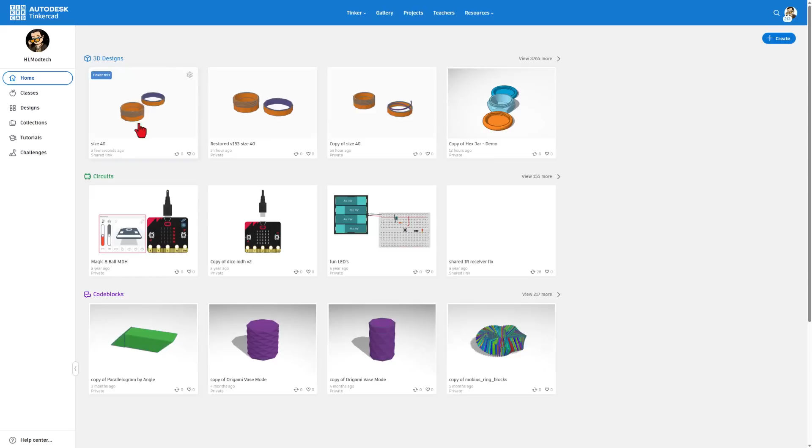If you've never used Tinkercad before, you can get here. We're using Tinkercad.com. I always choose sign in with Google. This is what designs look like. You can see they are saved to the cloud. I've had a few of these as I was fiddling.

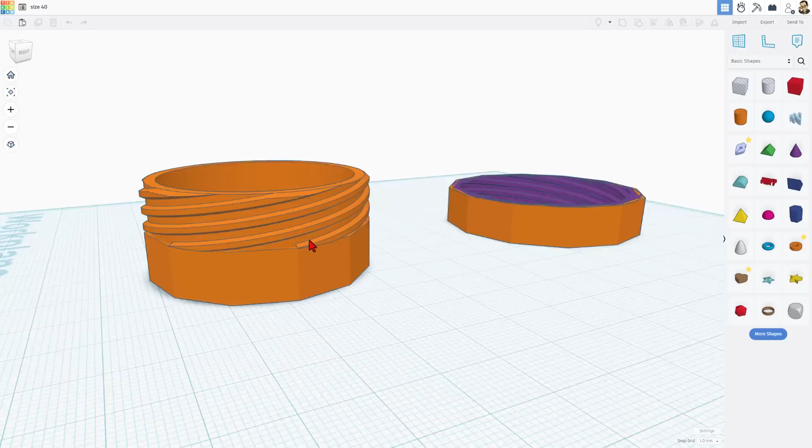I'm going to take you into the size 40 real quick and let me show you what it looks like. This is the thread. Now this thread is shared by ZDP 189. It has characteristics that make it better for 3D printers. The sloped angles make it easier for the 3D printer to print it, and they turn out really slick. It has 6 starters so that they're easy to put on, and they tighten really quick.

Once again, that's the working version. You can see how slick it turned out. Really quickly, let me bounce you back, and let's make a scratch one. We're simply going to hit create brand new 3D design.

I am going to start by naming it. We're going to call it thread 34. And we're going to search for the star of the show, the thread shape. If you type thread, bingo, it shows up, and we'll bring the thread out.

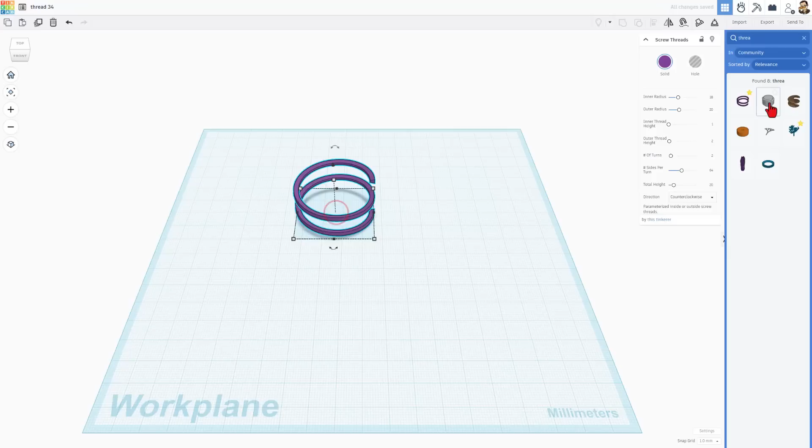I do want to highlight, a lot of people use this ISO metric thread. I'll set it beside it, and I'm going to show you real quickly, its thread pitch is a little bit harder for 3D printers to work with. That is why ZDP came up with this awesome technique. If you haven't seen my how to make an ISO thread video, I will have that listed up above.

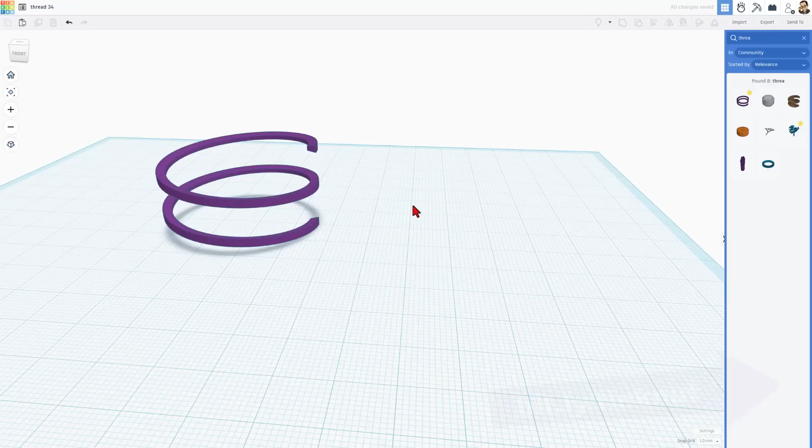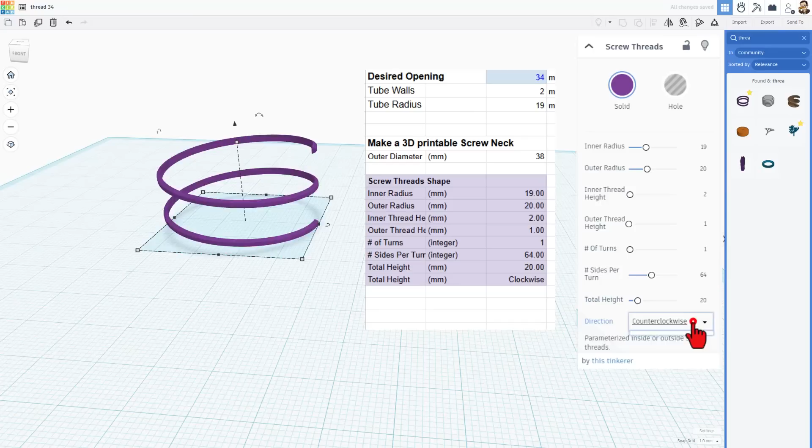So now let's go to the spreadsheet. First, we're going to make the screw neck. Once again, these are the numbers that were calculated. For that size 34, I'm going to type 19 and press enter, 20 and press enter, although that already was there. And then we're going to do 2, press enter, and 1, press enter, and 1 for the number of turns. We're going to keep the 64, we're going to keep the 20, and we've got to make it clockwise.

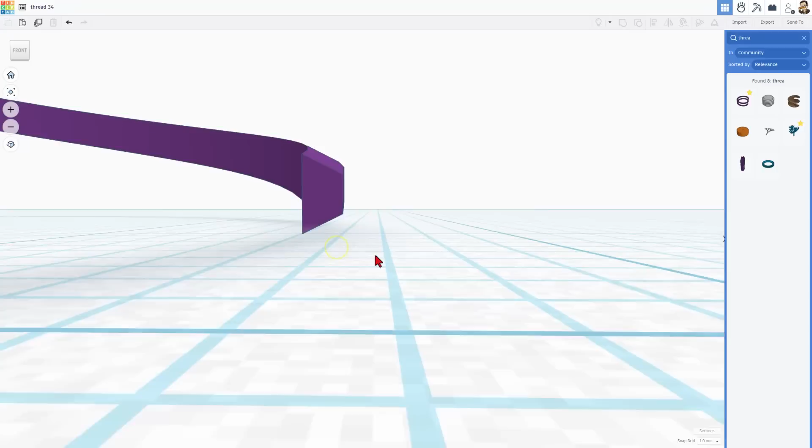Notice the red lines as the system is thinking. Just be patient as that all snaps into place. I'm also going to hit D to drop so it's at the correct level. Now friends, this is our thread, and when you look at it from this angle, you can see that's why it's easy for a 3D printer to print. It slopes up all the way around. That is the basis of the system.

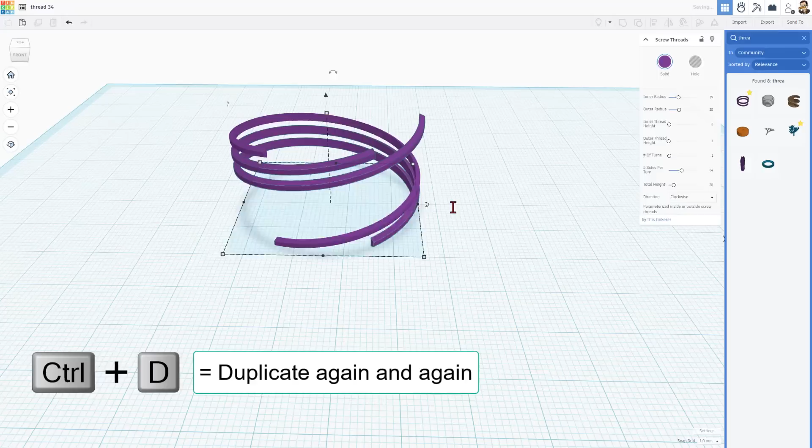The next thing I want to share is that we're going to have 6 starters. What that means is we do Control D. We rotate this 60 degrees. Notice I moved the mouse a long ways away. I'm letting it get to any number, and then I'm going to type -60 or +60 and press enter. And then we'll do Control D again and again until we have 6 of them. Those are the 6 starters for our project.

I'm going to bring out another one of these for later, and I'm going to grab the tube. When we bring it out, these are the numbers that we had at the first part. Remember where it had the tube walls and the tube radius? We simply go over here and we type those in. So for our shape, it's going to be 19, and then the wall thickness is going to be 2, and press enter.

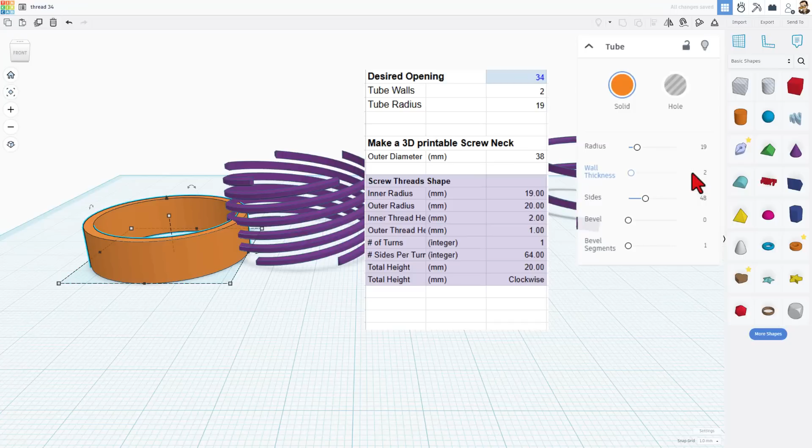If we select all of these and do L for align, I'll let this one be the boss and choose center, center. And then don't forget you want to center them vertically as well. Right there, that is the neck of the container that we're going to build.

Right now we need to trim this off. I'm going to do that by drawing this out on the orange piece. Notice if you miss, you could just hit the work plane and set it there. And then we're going to make it larger than the shape, so I'm just stretching it past with the black handles.

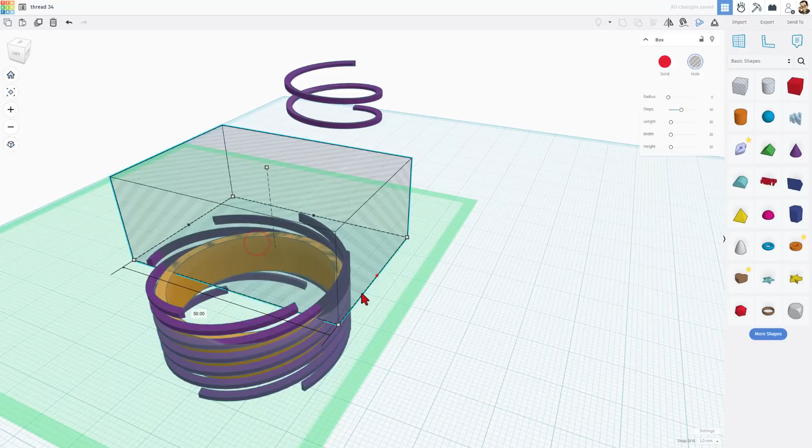And then I'm going to take note of the height. See how this is 20? So if I do Control D and D to drop. Now if I push this down -20, it is exactly at the 0 point of the project.

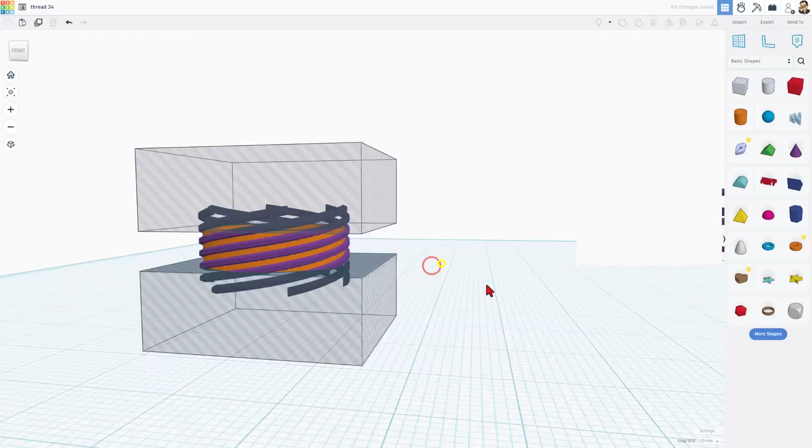I'm going to quickly select just the orange piece. Let's double check our sides. It was at 48. I'm going to put that to the max of 128. Now we can select all of this and do Control G to group. Bang, you have got a 3D printable thread. How cool is that?

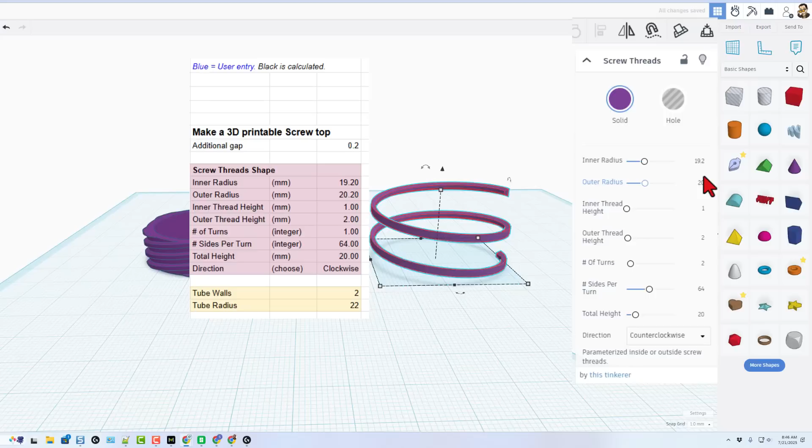Let's real quickly make our top. Once again, we're going to click on this thread, and now we're going to use the screw top info. So these just really have 0.2 added. So we're going to put 19.2, and we're going to put 20.2. And then this one goes 1, 2, 1, and press enter. Notice if the design ever looks wacky, just type those numbers again and press enter. And then don't forget, we keep the 64, the 20, but we have to switch it to clockwise.

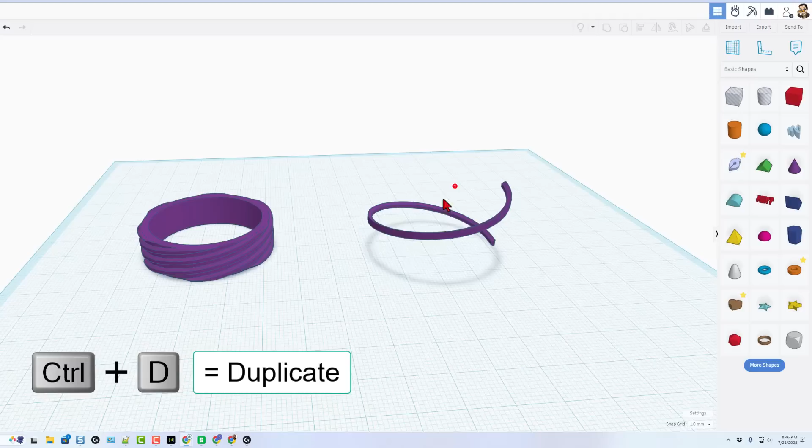When we're done, we can grab the thread, do the Control D, rotate it 60 degrees. Notice I go anywhere, and then I type the 60, and then do Control D again and again and again until we have all 6 of them. I'm going to grab those real quick and hit D to drop.

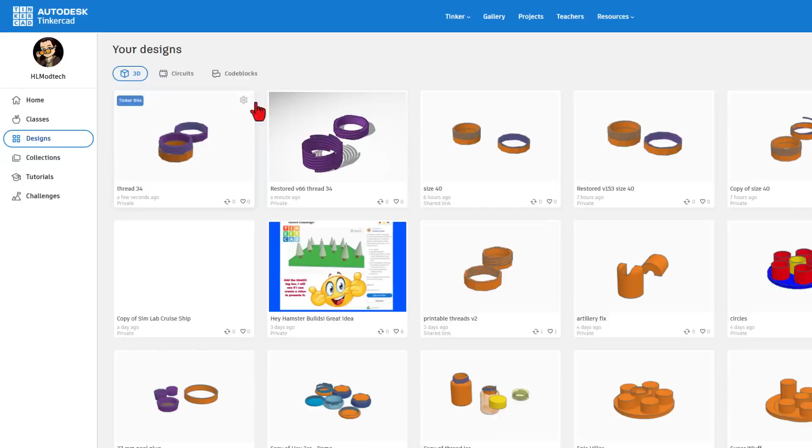Now as we bounce back to the spreadsheet, you'll notice I'm already at V1. That is because I added this 2 walls and the radius down here for what we're going to build next for the screw top. Really quickly, I want to back out and show you something real cool. This is our workspace. Once again, these are our projects. This is that thread 34 we were working on.

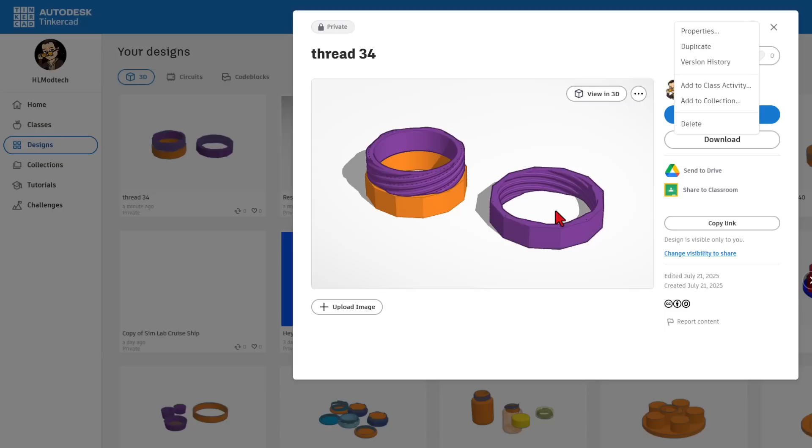What I want to show you, though, is that we can go back through version history. What you've got here is I finished this project to make sure that it printed the way I expected before I recorded the video. Now, I want to go back and show you the steps to make it. Check this out. Version history. There are 143 versions, and I can check back for 4 hours ago or 5 hours ago. I know that I quit at about 8:48 because I had to go walk the puppy.

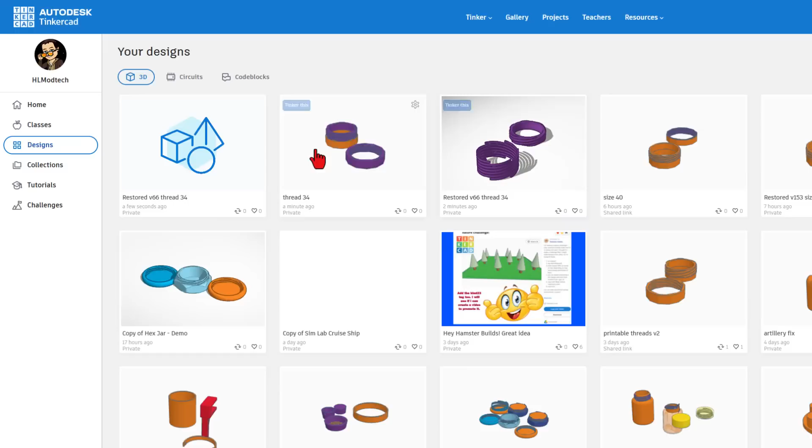So if we go back here, bingo, we can find version 66, and I simply hit restore, and bang, I have got the exact copy from when I quit. You can see I already did it once, so we can actually restore more than once as we're working on our projects. This is a fantastic technique if you ever make a mistake and want to go back to the previous version you liked. As you can see, there are our threads. This is the finished one for the throat, and right now we're building the top.

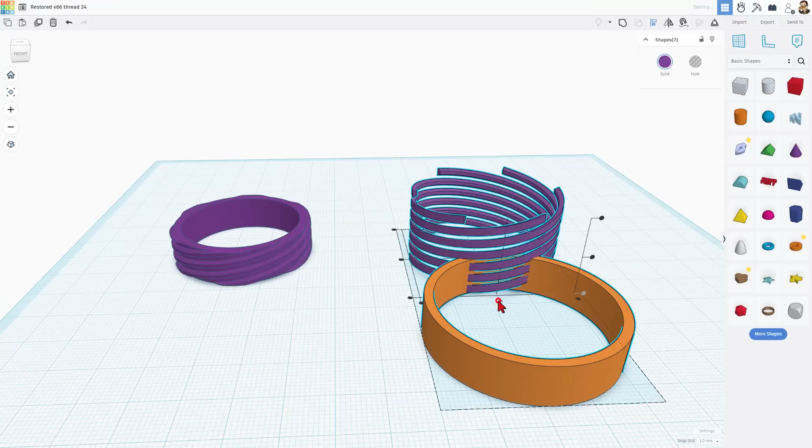To build that top, we were going to use a tube, and don't forget our radius was 22, which we got from the calculator, and we did size 2, and this time we're going to maximize the sides right from the beginning. Once again, select them all, L for align. I'm going to click on a thread to make it the boss, choose middle, and middle to get them all aligned. Do remember we also need to align the threads to the middle of this tube. Notice I just click the tube to choose that as the master, and then bang, it is in place.

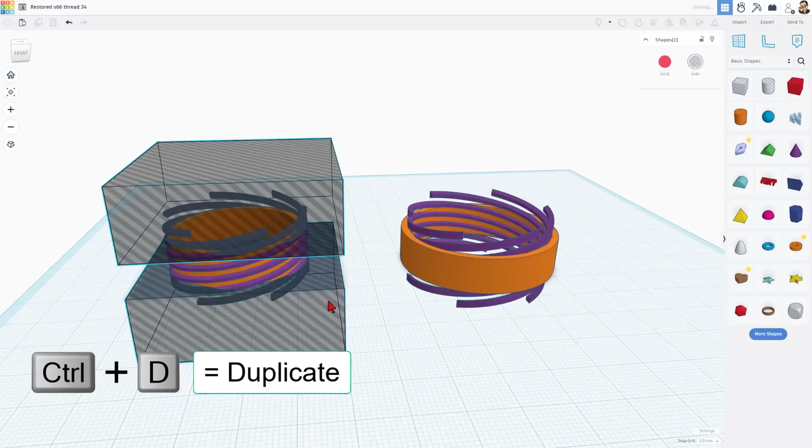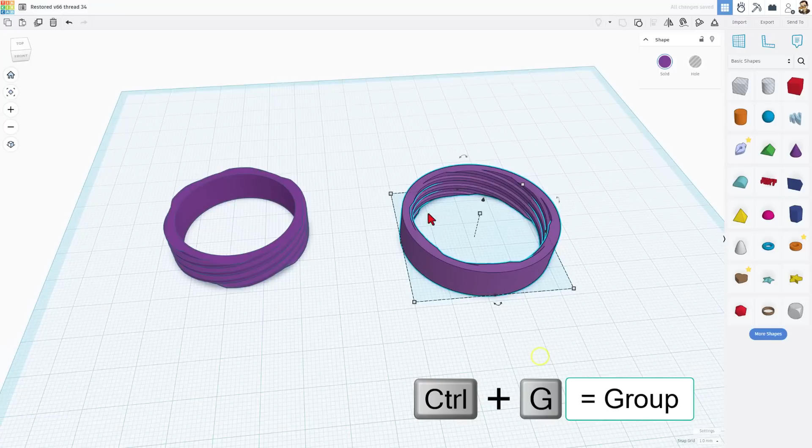Of course, we need to do those cuts. Once again, we're going to do that by simply ungrouping it, selecting these, doing Control D, Shift nudge to the right to get them close. We can go back to this set and do Control G to regroup them. And then we're going to simply grab all of this and do L for align, and we want to align it to the tube, simply center and center. With those all in place, we can now do Control G to group. So this is the inside and this is the outside of our thread.

We have one more step to make this easier to work with. We need to trim this with a cone. We're going to do that by simply bringing the cone out and then once again returning to our spreadsheet, and this is where you find the cone numbers. Remember, ours was 19.1 and press enter.

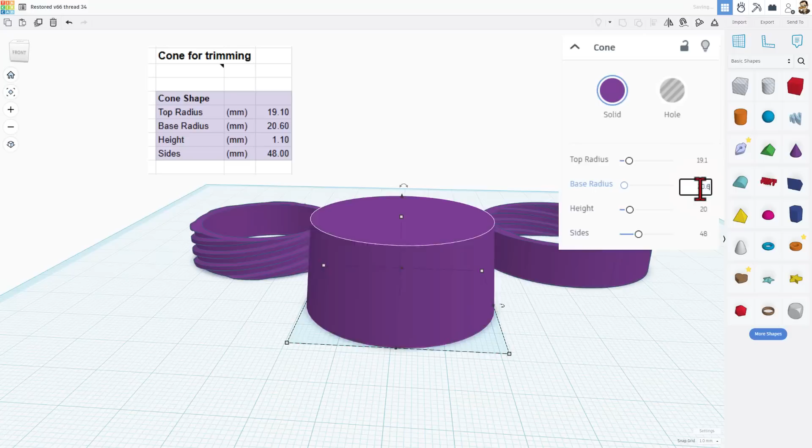The base radius is 20.6 and press enter, and then we always use the height of 1.1. I left the sides at 48. We need this to be a hole, and then we need to cut it out with an inverse hole. So we're simply going to bring out a cube. Make sure it is larger than the shape that we had. That is bigger in every direction.

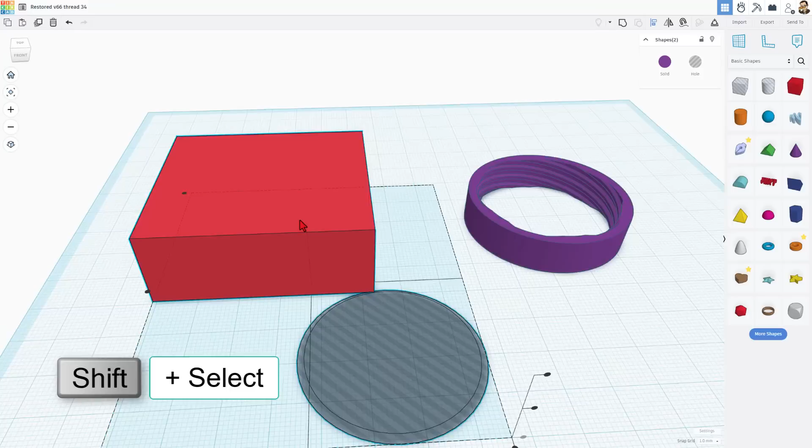Now I can do Shift Select to grab those two. L for align, make the red one the boss, and choose center and center. And we do want it at the bottom. When you do Control G, if you look underneath, you'll see that is cut out. That makes it an inverse hole.

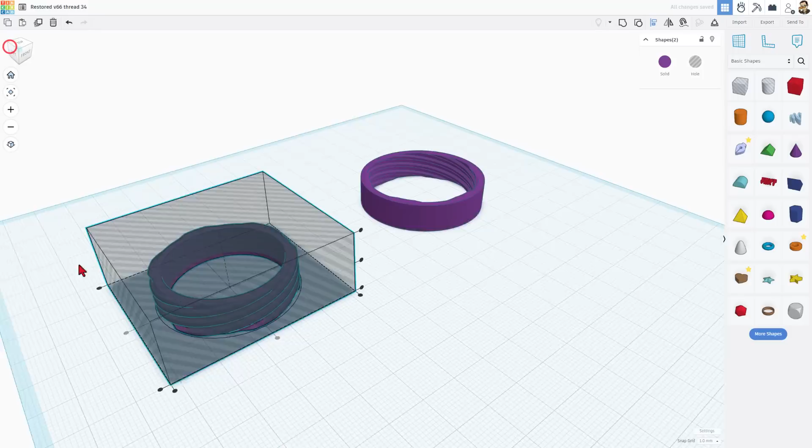Now that we click the hole option, we can simply grab our shape over here, do L for align, and choose middle and middle. Quite often I like to look at this from a corner so it's easier to find that middle one. And now we just raise this up until it's ready to trim. To get it to the perfect height, you simply switch to the 0.1 nudge.

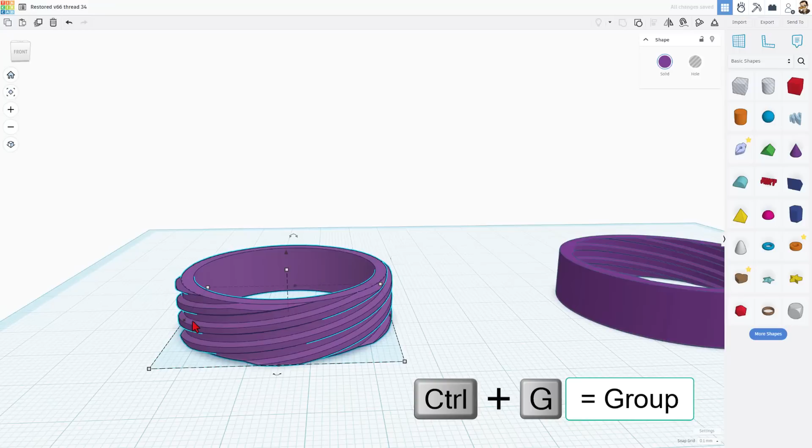Notice when you do Control Down and you see the gray where this would be cutting out that top edge, you just do Control Up, one more click. Select those and do Control G to group. Now these are trimmed so that it's easier for the thread to start.

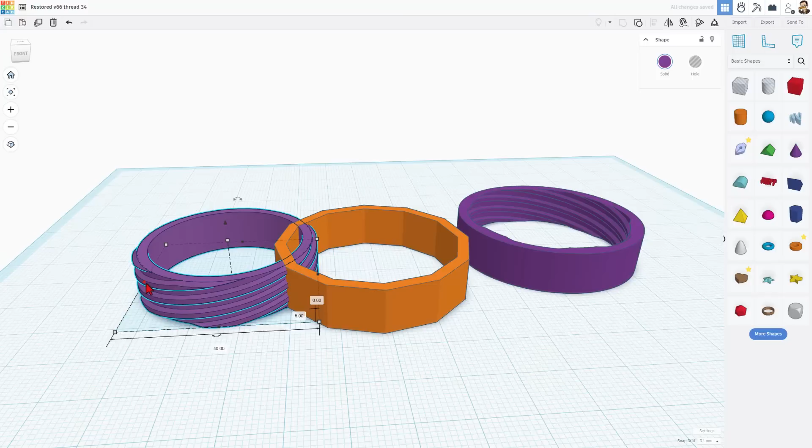Now you can add these to whatever container you wanted. I'm going to simply make a fake container with the tube. I like this because I can quickly set the sides to 12. That gives you something to hang on to, and we can use our old tube measurements to get this pretty quickly. If we type in that 22, real quickly, I'm going to cruise this on top by hitting the letter C, grabbing that dot and just setting it up on top of the shape.

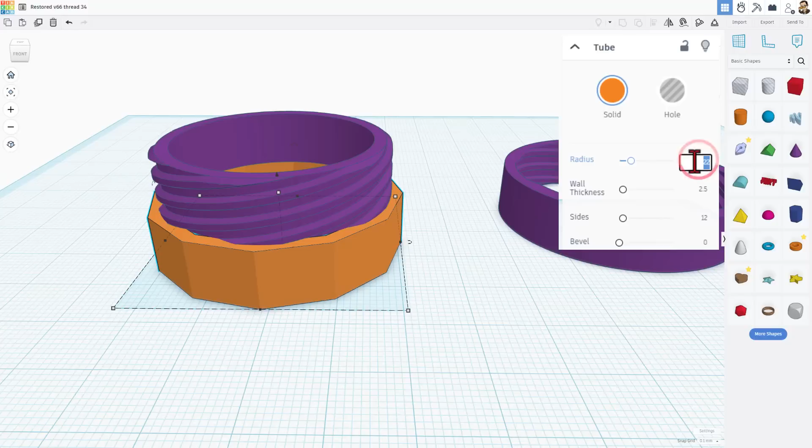Then we can select the two of them, choose L for align, and I'm going to click on the thread and choose center and center. Looking real quickly, you can see that that does connect. We can adjust those numbers if we want. Let's see what happens if we do 21. I like that even better. It's inside, everything's groovy. I'm going to leave that one alone.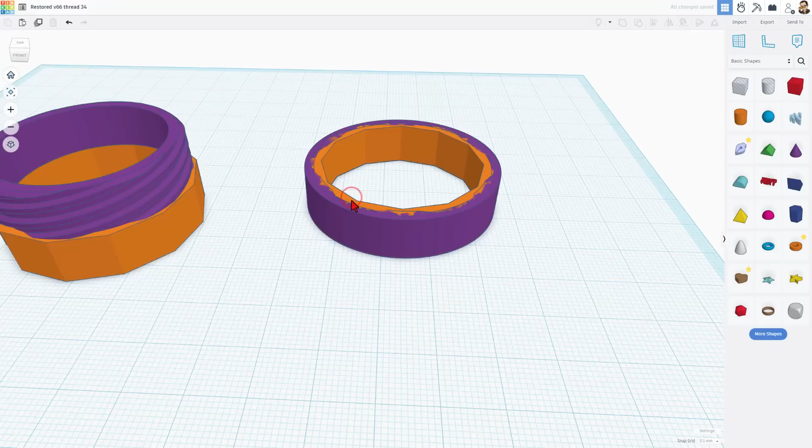I do want to come over here and do the same type of thing. Once again, Control D. Let's move this over with Shift Nudge. This time when we select the two, we're going to do L for align, make the purple one the boss, center, center, and then we want this to be further out. So I'm going to just take this and make it 23. That's not quite far enough. I'm going to try 24.

And then I'm going to set this wall thickness to just 1, making sure that it does not touch the threads. Let's see if we can get by with 23. Yes, we can. Now on both ends, we'll be able to grip the parts.

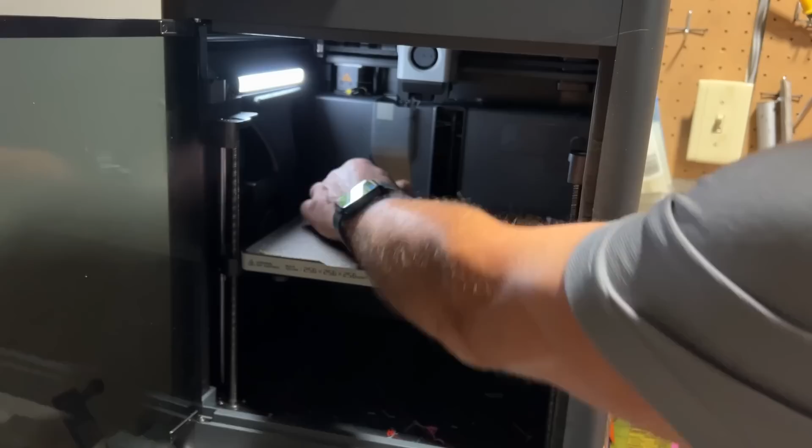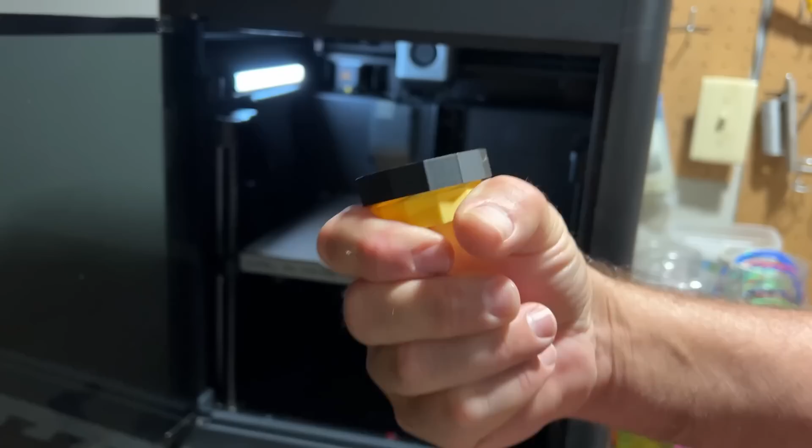And a little more than 30 minutes later, let's see what we made. We've got a thread. Remember, we cut the top. And bingo, it works just like that. 3D printable Tinkercad threads. You pick your size, and bam, you're good to go. Now, friends, this is the version I sent to the 3D printer. Obviously, I'm showing you on the screen. It worked like a champ.

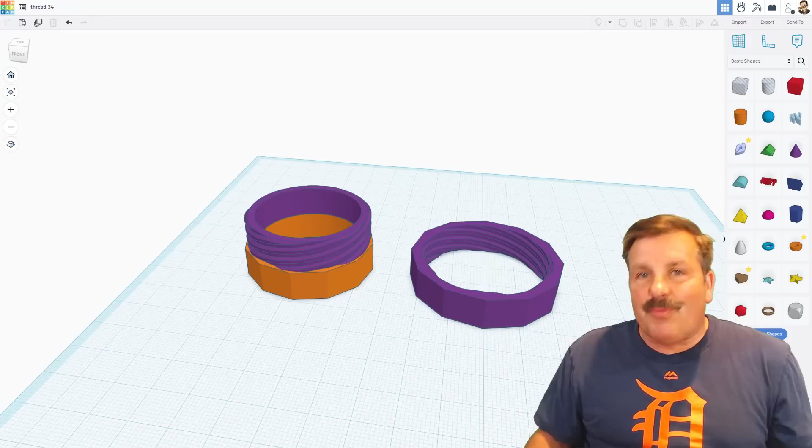I do want to remind you, try this so you can get the hang of it with your printer. I'm using a P1S from Bambu Lab. 0.2 is a good gap for that. If yours is too tight, just rework the calculations with 0.3 or 0.4 once you get it figured out so it works for your printer. Then, of course, you can start making your own awesome projects with all sorts of threads. Once again, friends, I want to give a huge shout out to ZDP189 for sharing the technique.